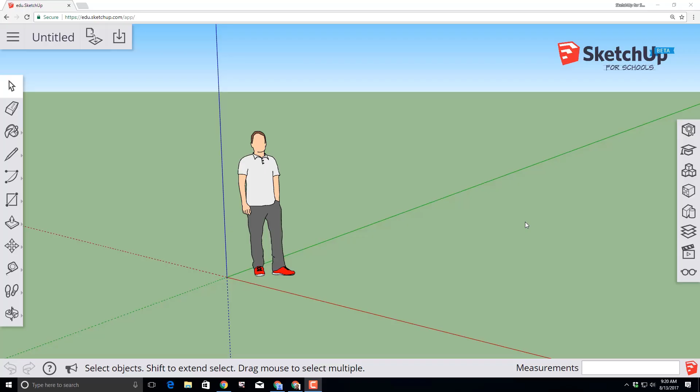So, let's get cracking! Welcome to the SketchUp for Schools Ice Cream Shop tutorial. Let's start by naming our file and calling it Mike's Ice Cream Shop. Mike is the model on the screen, so that's why we choose that name.

Click OK and it asks you what folder you want to put it in. We put it in our SketchUp Models folder, which is created automatically for us when you first launch SketchUp for Schools. All of these are stored in our Google Drive.

Mike's job is to give us a sense of the size of the objects we draw on our model. We're going to click Select right now though, and we're going to press the Delete key to remove him from our screen. Notice that when we make a change, it says you need to save, so it always keeps us alert that we need to save these projects that end up in our Google Drive.

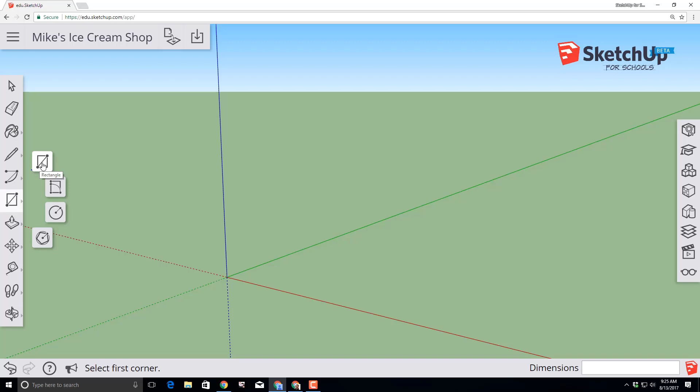Let's start building by moving over to the toolbar and clicking on the rectangle tool. SketchUp is a click and release program, so you click and let go, and then click the tool you want to use. Notice there are so many cool options.

We are going to use the rectangle, and then from the origin, notice it shows you the origin. I want you to click and let go so that the tool is adjustable, and then type on your keyboard 30 with the foot symbol, then comma, and type 20 with the foot symbol. Notice it shows up down in the dimensions box, and when you press enter, you are rewarded with a box that is 30 feet by 20 feet.

Let's change this flat shape into a three-dimensional shape by using the push-pull tool. Click push-pull, click the center of the shape and lift it up, let go of the mouse button, and then type 10 with the foot symbol for how large you want that to be.

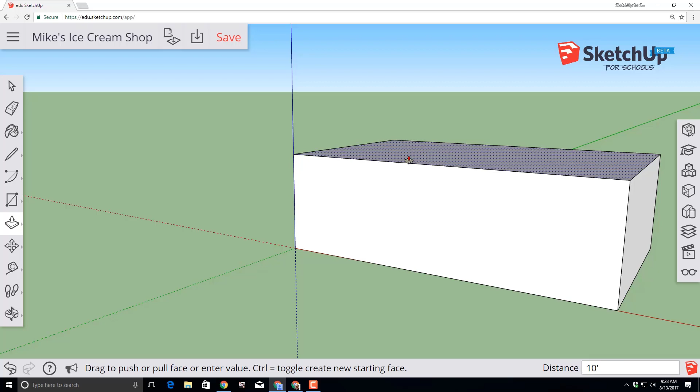Let's give our ice cream shop a little pizzazz by using the orbit tool to drag the mouse so we're looking underneath. Switch to the amazing offset tool. Click that face and extend it past our original shape. Type the number 3 with the inch symbol and press enter, so it gives us a 3-inch offset.

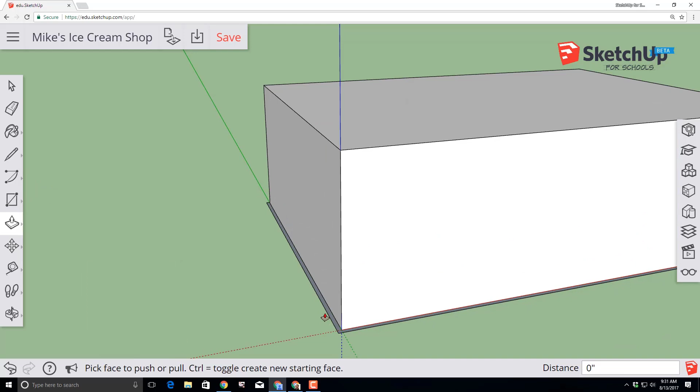Find your orbit tool again. Drag downwards so that you can see that new offset. Switch to the push-pull tool, and I'm going to scroll in so we can see this better. Click on that face and lift it up, typing 2 with the foot symbol so it snaps to exactly 2 feet tall. Use the orbit tool to look at the top, scroll out so you can see it a little better.

Click the offset tool, and click the face, and then with it adjustable, go past the original shape and type your 3 inches again. Switch to your push-pull tool, click on that newly made offset, and we need to make it 2 feet tall as well by typing 2 feet and pressing enter.

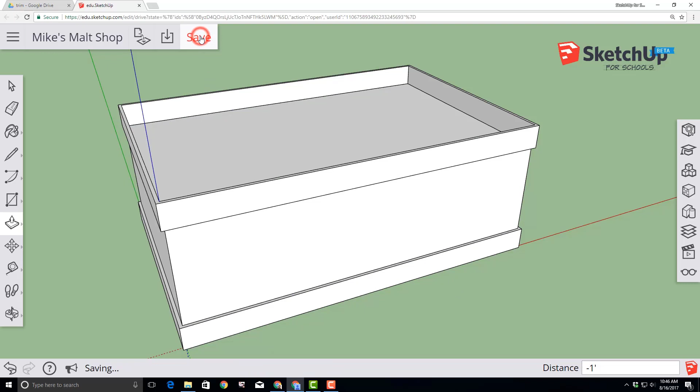It's important to note that SketchUp for Schools does not have an autosave, so let's click save at this time before moving on, and stay aware of that red save button.

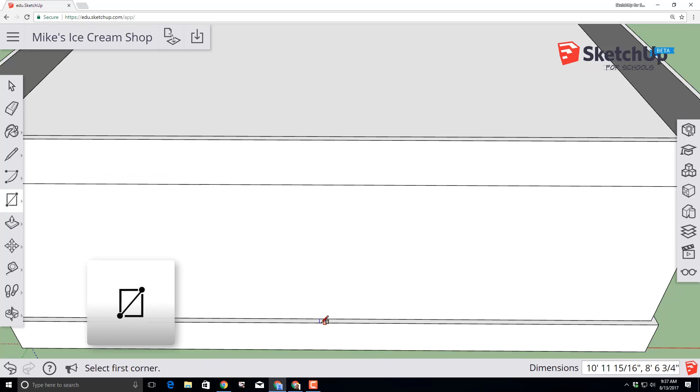Use the orbit tool to spin your malt shop around so you can see the front and are looking down at your offset. Switch to the rectangle tool, and then with the rectangle tool, find the cyan midpoint.

Move the mouse to the back edge of that wall and type 3 feet, comma, 3 inches, and press enter. Repeat that process in the opposite direction, also typing 3 feet with the foot symbol, then a comma, then 3 inches, and pressing enter.

Let's bring the erase tool into play, and let's eliminate that box. Notice we've now made a 6-foot entryway.

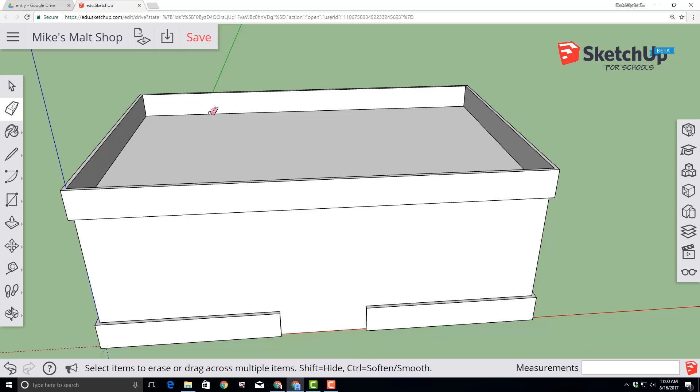Let's clear out that entryway with the push-pull tool. If you bring this down and touch the edge point, it cuts out all those instantly. Then let's use the eraser again to erase that line that was going through. Since our entry is completed, let's click that save button.

Let's add an awesome door to our entryway. First, let's use the orbit tool so that we're looking at our store from below. This helps us find the midpoint in a moment.

Click on the components choice and type SketchUp for Schools door, making sure you do a capital U for SketchUp, and that will give you the awesome door for our ice cream shop. When you click, it'll bring it in, and if you go to the midpoint of our entry, you can immediately snap it into location. With that completed, let's click Save and then move on.

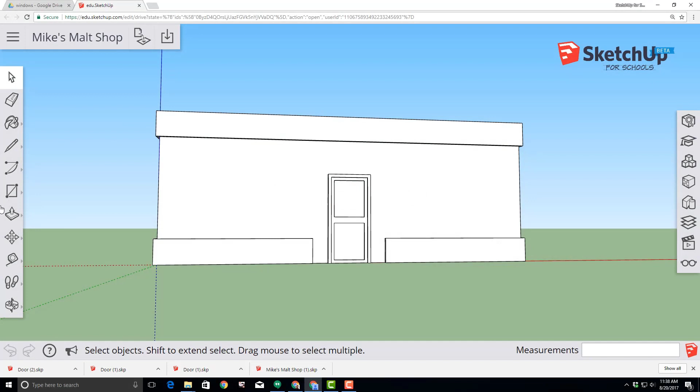Let's add some amazing windows to our project. Our first step has us clicking the tape measure tool. Click on the tape measure and click on the edge of our building and type 2 feet, so it gives us a 2-foot guideline. Do that exact same step from the other side, doing 2 feet as well, and then go in between the door and the trim and make a 3-foot high guideline.

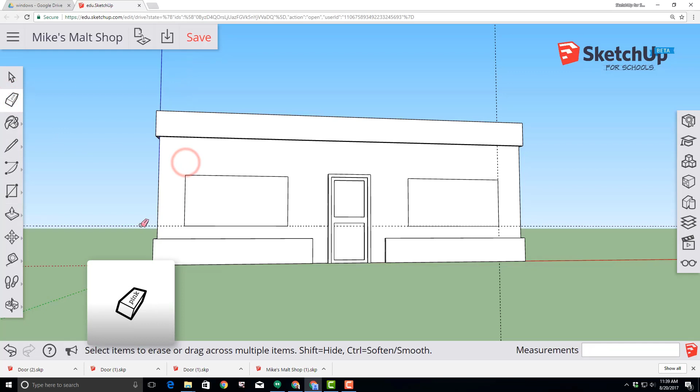With those guidelines in place, switch to the rectangle tool, click on the intersection, and make an 8-foot by 4-foot rectangle that'll be our window. Do the exact same thing on the other side, typing 8 feet, 4 feet, and pressing enter when you're done. Switch to the eraser tool and remove those guidelines so they are out of our way.

With that completed, switch to the amazing offset tool, click on the edge of our item and type 3 inches to create a 3-inch offset. Do the exact same thing on the other side. Then switch to the push-pull tool, and with the push-pull tool, pull that trim out 3 inches, typing 3 inches and pressing enter.

Congratulations on making epic windows. At this point, hit save, and let's move on to awnings.

Let's add some amazing awnings to our ice cream shop. Start by using the tape measure, moving to the edge of the wall, and coming in 1 foot by typing 1 foot and pressing enter. Do the same thing from the other side.

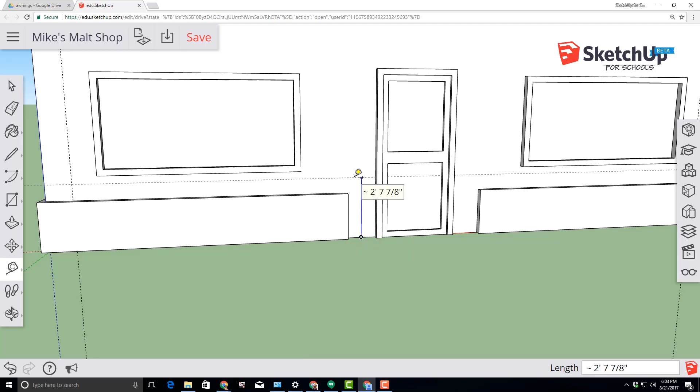From the midpoint between the door and the trim, make sure you're on the blue axis, type 7 feet, and press enter as well. This creates a nifty little intersection for us to make a rectangle from, and we want to make a 10 foot by 2 foot rectangle, and press enter.

With the select tool, double click our newly created awning and make it a component, naming it awning. Then click on the glue to vertical choice and click on OK.

Switch to the move copy tool, click on the right corner because we're going to connect it to this corner, tap Control to go to copy mode and snap it to that intersection. Switch to your eraser tool and let's erase those guidelines we created.

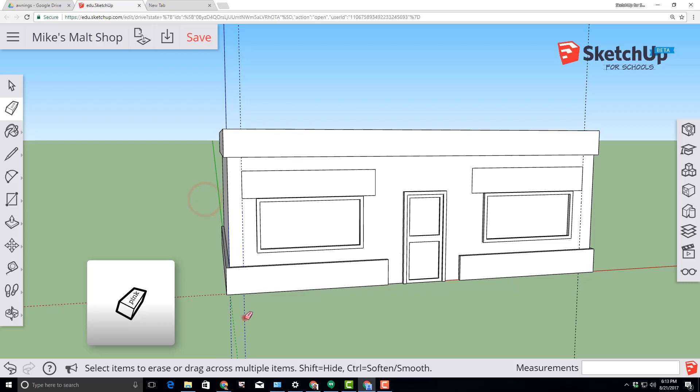Using the select tool, double click our new awning and use the push-pull tool to pull it out 3 feet by typing 3 feet and pressing enter.

Orbit so you can see it from the right side. Grab the 2-point arc, click on the top corner, the bottom corner, and type 6 inches so it creates a 6-inch arc. Choose the push-pull tool and push it all the way across, touching the little red point to the end point to complete our shape.

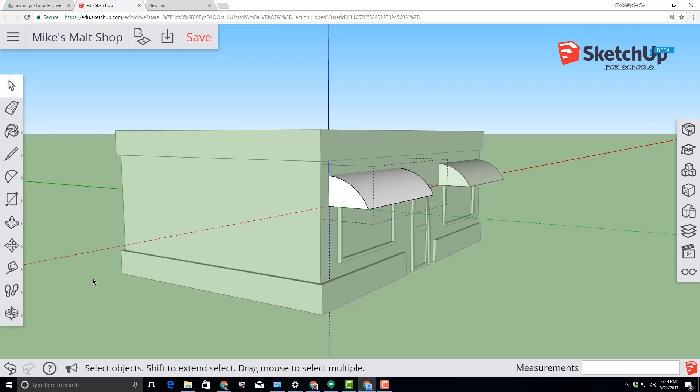Switch to the select tool and click anywhere out in space to close our component. We're only halfway through our awnings, but let's hit save just because it's a good practice to get into.

Switch to the pan tool and drag everything a bit to the right. Switch to the orbit tool and look below your project. Find the move tool and click on the bottom right hand corner of the left awning. Tap Control, notice the plus sign, to go into copy mode and attach it to that edge of the building.

Switch to the rotation tool and click on the first corner of our project and the last corner of our awning, and then rotate it 90 degrees. If you move to the protractor with your mouse, it'll snap to the 90-degree mark.

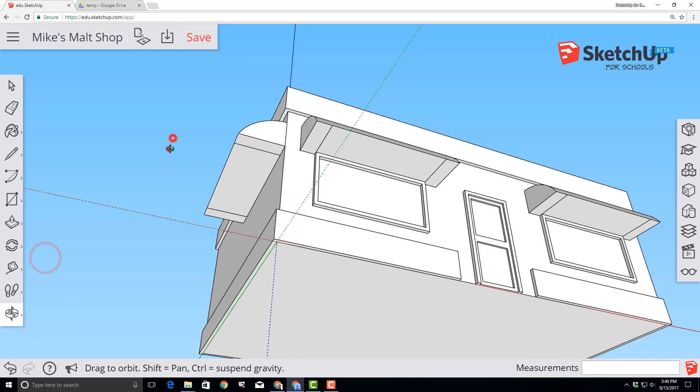Switch to the orbit tool and drag so you can see your project from the top. With our awning selected, switch to the scale tool. The scale tool has handles, and when you go from corner to corner and make it adjustable and then type 0.6 and press enter, it scales it to 60% of its original size.

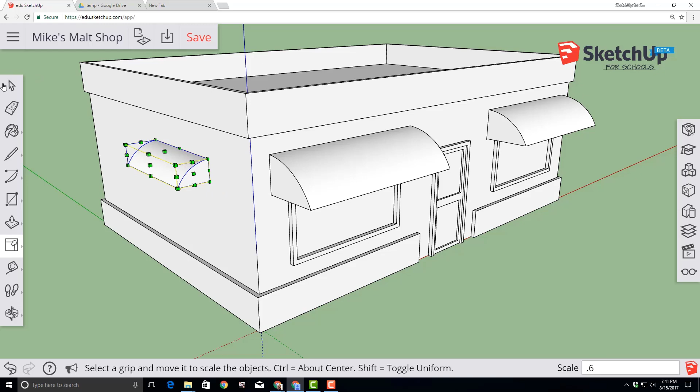Orbit around and take a look at how awesome your ice cream shop is turning out, and then make sure you remember to click save before moving on.

Double click the left awning to enter the edit mode. With the select tool, click the left arc, then click the move copy tool. Click on that arc again, hit Control to go into copy mode, and move that arc to the other side.

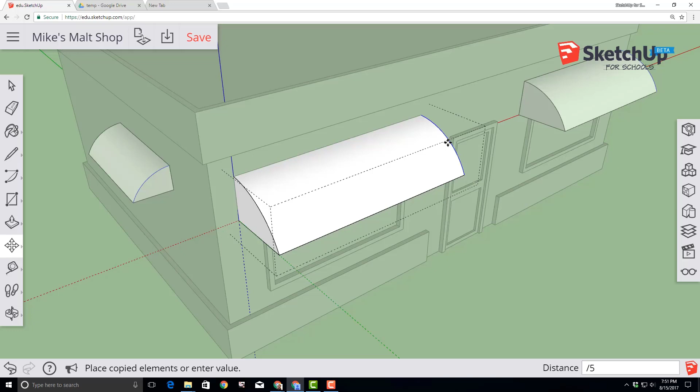Click and then do divided by with the divided by key and press 5 and then press enter, and it will instantly slice all the awnings into 5 equal sections.

Components are amazing this way because they make us so much more effective. Click on the materials and find the red color from the color choices and color every other piece of the awning red so that it becomes red and white. When you're done, click outside the box to close the editing of the component, and then click Save.

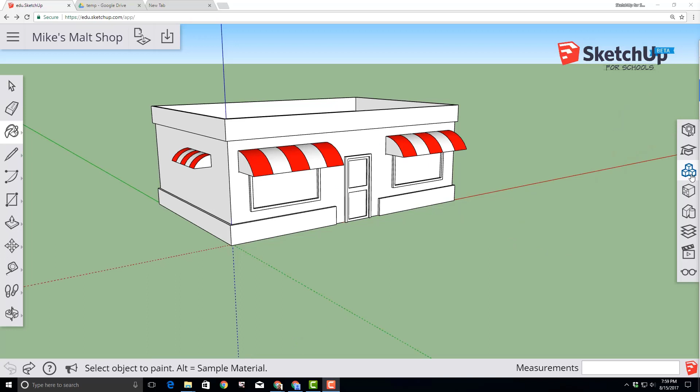Now, let's select a color from the materials to paint each wall of the shop. I'm going to paint mine a shade of blue.

Use the Orbit tool to move around your building and paint all of the walls of your ice cream shop. Make sure you orbit when you're finished to check and see that you got them all. Since we've made changes, let's click Save.

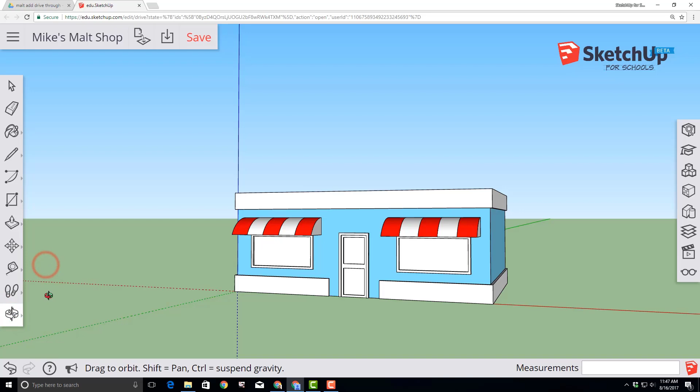Grab the Orbit tool and rotate around so you can see the left side of our building and the underside of our awning. Switch to the tape measure tool and click on the line under the awning and make a 3-foot line along the blue axis. Let's orbit so we're looking a little bit more from the side.

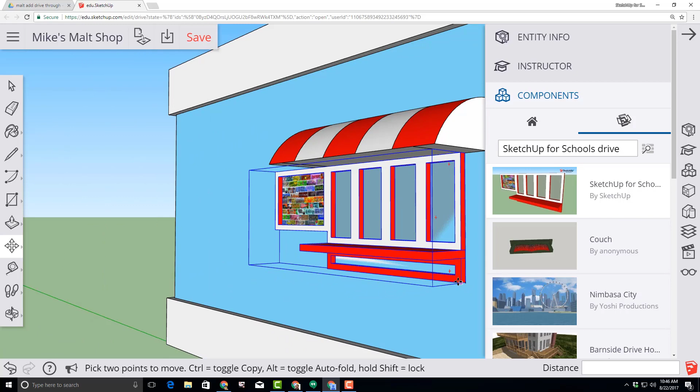Click on our Components tool, type SketchUp for Schools Drive and press enter, and you'll be treated to the SketchUp drive-through window. Click it, bring it out on the face, click to set it down on that face, grab the corner by zooming in and finding it, and then snap it to that guide point we made earlier. Notice it tells you you've reached the guide point by popping up the little window. Scroll back out, pat yourself on the back for being awesome, and click that Save button.

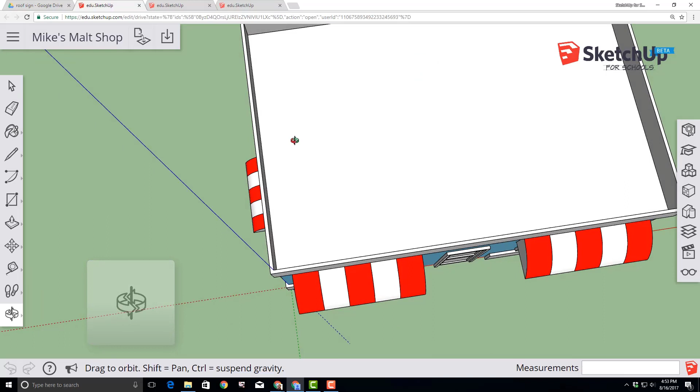Use the Orbit tool to switch so you can see your building from the top. Choose the Rectangle tool and make a 30-foot by 2-foot rectangle by typing 30-foot, comma, 2-foot, and press enter. Use the Push-Pull tool to raise that up 6 feet and press enter.

Orbit so you can see from the front, and use the Push-Pull tool again to pull the face out so it matches the face on the front of the building and both sides.

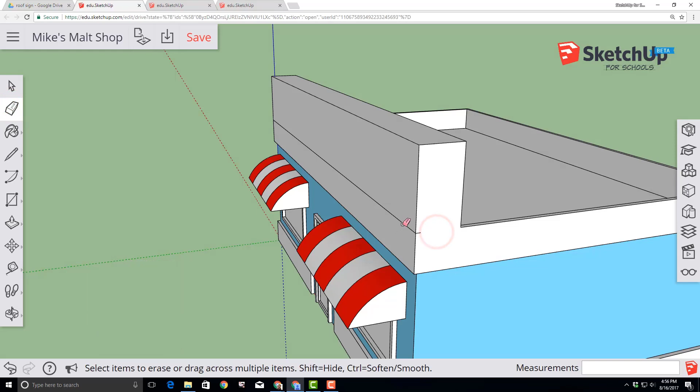Choose the Eraser tool and erase those seams to make it a one-piece design again. When you have that completed, let's click Save so we never lose our work.

Scroll out so you can get a big look at the world, click on the components, and then type in SketchUp for Schools Ice Cream and press enter. Scroll down and find the one that was created by SketchUp. Click and bring it out in the world and set it on the face of your shape.

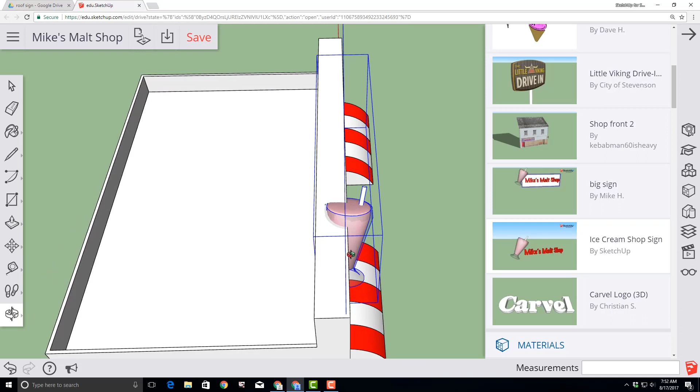Orbit so you can get a better look at it from the side, scroll in so you can see it better, and then use your Move tool to adjust it until you're totally happy.

When you have it placed, use Orbit to move the world so you can see the back. Click the top of the pediment, switch to the line tool, find the midpoint, and connect it across. Switch to the rectangle tool, click on one corner of the pediment, and stretch it out until you see it say that you just created a golden section.

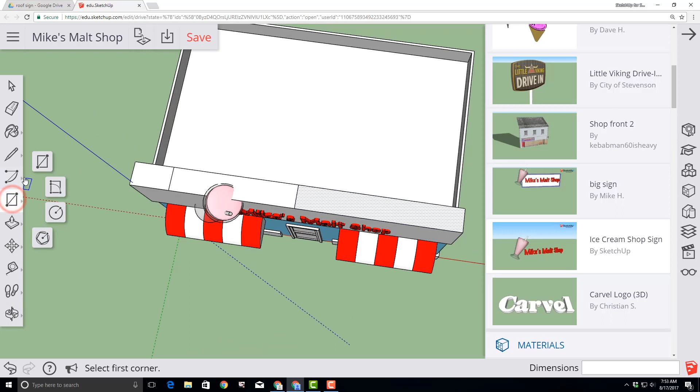Do the same thing from the other side. I'm going to orbit around so I can see it better. And then go back to the rectangle and create another golden section.

Use your orbit tool so that the world is more flat. Click the line with your select tool that is in the middle, switch to the move tool, and lift that line up from its midpoint 4 feet by getting on the blue axis, typing 4 feet, and pressing enter.

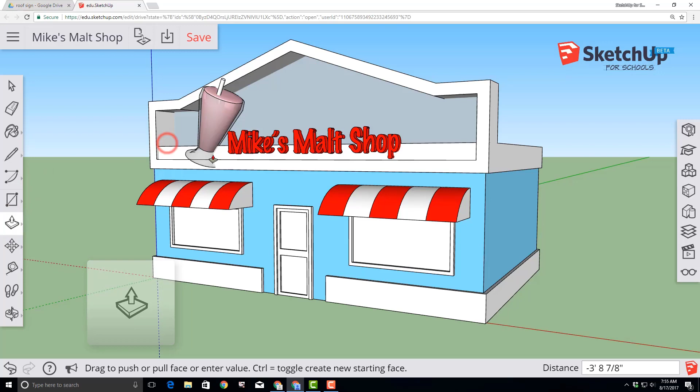Orbit so that you've got a look from the front or the front side. Switch to our old friend, the offset tool, and we want to make a 10-inch offset. When it's adjustable, type 10 and press enter. Use the push-pull tool to push that offset so that it matches the face of the building. Then switch to the eraser to get rid of that line that appears.

Navigate to materials and match the colors to the rest of your ice cream shop. With everything in place, let's make sure we click save so we don't lose our work.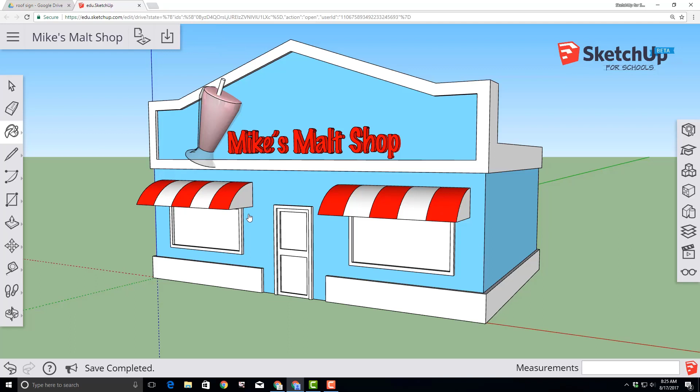Let's make our trim on our malt shop look a little more fancy. Switch to the circle tool, click out towards the red axis and type 1 foot and press enter. Switch to the push-pull tool and pull that up so it matches the height of the rest of our trim. Use the eraser tool to erase the lines.

I'll zoom in so we can see those better. And then repeat that process all the way around the building at all of the endpoints.

When you've completed the trim all the way around the building, then switch to your materials and find the asphalt and concrete. Select a concrete color you appreciate and add it all the way around the building.

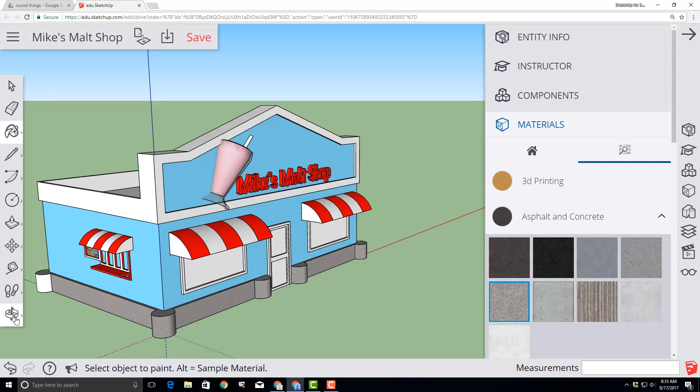Take a step back to see how awesome your project looks, orbit from every side, and practice clicking and saving as well.

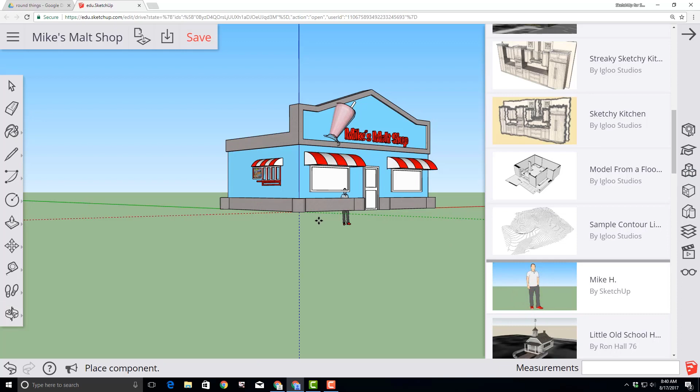Let's add a customer to our malt shop and put him by the order window. Click the components box, search SketchUp for Schools Mike, and scroll down to find Mike H by SketchUp. Bring him into your project, set him by the drive-through window, scroll in and adjust until you're happy.

Let's wrap up the colors on our project by going to materials, clicking the browse tool, finding glass and mirrors. Pick a glass texture you think will look great on your shop. I'll use the gray one, click the select tool, double click on my window component, go back to that gray glass texture, and put it on both windows.

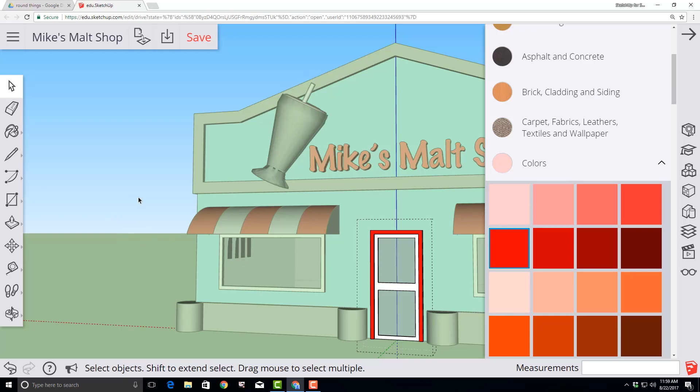I'm also going to add red trim by revisiting the colors, choosing red, and making the door that awesome red. Remember, when we click select and click outside our component, it finalizes that component, and we can take a step back, look at our amazing malt shop, and hit save once again.

Now that you've got everything put together, use the awesome components and all the skills you've learned to make this malt shop look just the way you'd like. Thanks for following along in the tutorial. Make sure you save your work, and we hope these skills are useful as you keep SketchUpping.

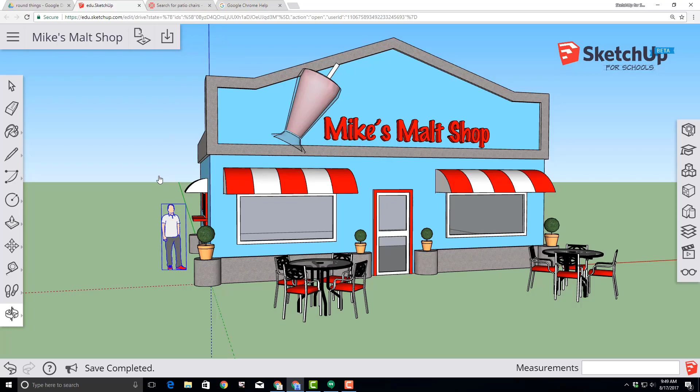Good day, world. It's me, Mike Harmon, or HLModTech, and I'm here today to show you how you can participate in the 3D Vermont project without even installing SketchUp on your computer. You can use a Chromebook or any kind of laptop. Let's get started using my.sketchup.

Up in your browser window, type my.sketchup, and it will take you to a 3D Builder online site. If you're using a school account, you could also use SketchUp for Schools. Both are great choices. When you get to this site, you can just immediately click Start Modeling.

Of course, you need to sign in, and we're going to sign in using Google. You may get a message about cookies, and of course you need to use those. And with any project, we need to name and save it.

Let's start with a click and then enter the SketchUp folder. Note this is saved with Trimble and not in your Google Drive, and then give your project a name. I'm going to use my same Wilder Vermont project, just because I want to show you how well this mimics the actual SketchUp program you have to install.

Step one is to select Josh and hit delete. I want to use a location, and they've got an add location tool. In the professional version of SketchUp, it shows the buildings on these streets, which is wonderful, but you can see here it does not show me the building size that I want. So let me show you another way to get it.

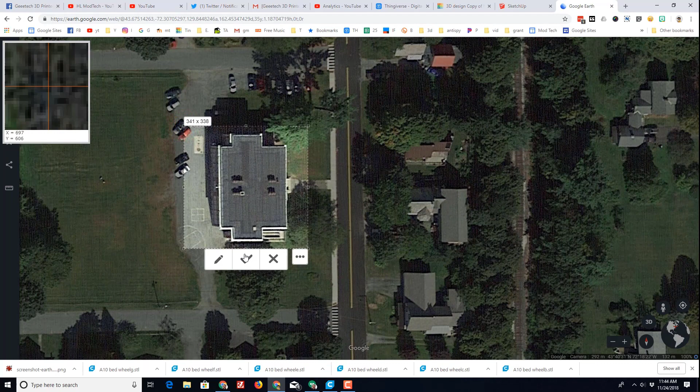Once I grab it, I hit the check mark to bring it in, save it to my downloads, return to SketchUp, and bring in that file by simply dropping it on this location. Here's my screenshot from the downloads folder. Drop it in as an image.

I'm going to double check by grabbing the tape measure tool, and let's see how close I am to the right dimension. If I go from here to here, right now I'm at 69 feet, so I'm going to stretch that out a little further. If I click on that image and do the scale tool, I can pull that out until it's the size I want.

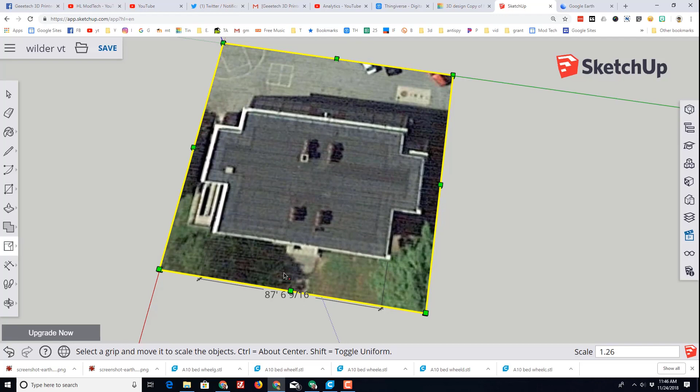This is kind of neat - you can see that it actually moved with it, so I can tell my building is now 87 feet across. With that completed, it's time for us to get our axis set up.

Back on that same tool, find the axis tool, and let's zoom back to the back corner. When you bring this out, we want to get it right to the spot where you believe the edge of your wall is - I'm going to call that my red axis.

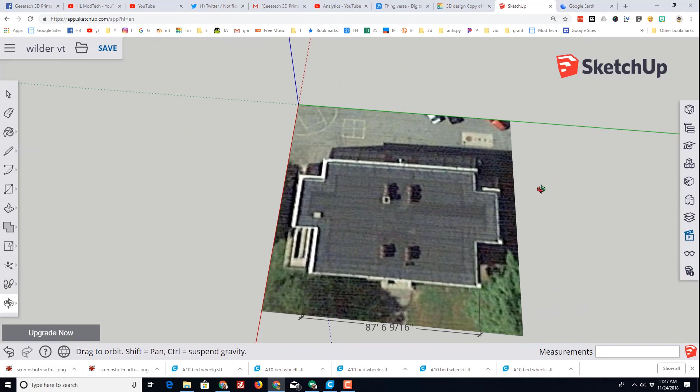Then I'm going to orbit, pushing in my scroll wheel so I can orbit, and I'm trying to line up with this part of this wall.

You want to make sure you have that as good as you can, because this is the first part of your building. I'm going to be happy with that.

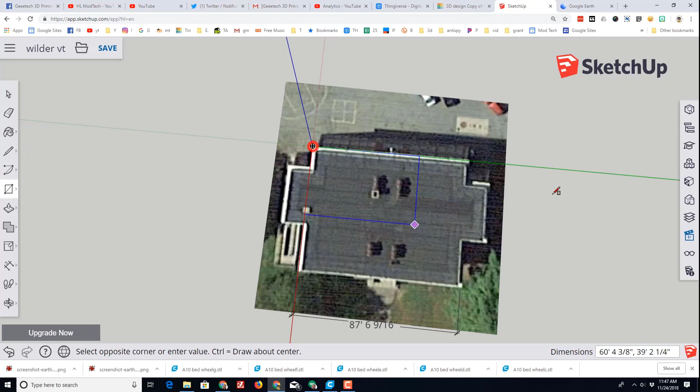Now I'm going to click the rectangle tool. Remember, you always click and release in SketchUp. So I just clicked and I'm stretching this out, and I'm moving in to put it on the exact corner of that wall.

Now I'm going to put in the little piece over here. Notice these are exactly across from each other. I'm going to do this one because I can see the white edge a little better in my picture. Then I'm going to move from this location, inferring the location, and I want it to go to the same spot on the other side. I'll double check this infer by moving across, and it'll show me when those are lined up. Then I click and make them permanent.

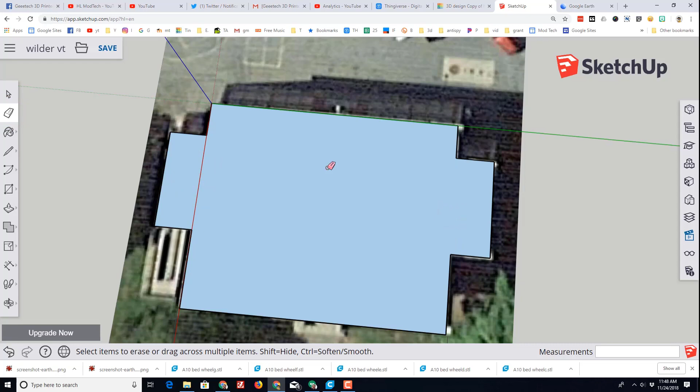Grab the eraser tool and remove those two sections that are inside the shape. This blue means that the face is the opposite of the way I want. I want the white face.

Now I'm going to push-pull my building up in the air so that I can add the texture of the front of my building.

We're going to go back to Google Earth to do that, and we're going to use the really nifty Street View. I'm going to drop it right in front of the building, and when it spins in there, I'm going to orbit using the mouse tool and get a good straight view of our little Wilder school.

Once again, I'm going to go back to the screenshot tool. I'm going to select that area, and grab from the bottom corner of my building all the way to the top corner. Notice I lose a little bit down here on the bottom because of the way everything is skewed, since this is a satellite image, or an image even from the low area of a vehicle on this one.

I'm going to hit save, put it in the same spot. Let's return to SketchUp, and let me show you how to bring in that image.

Once again, insert. This time though, when we go to the folder, we still drop it on top, but we are going to use it as a material. We want to put it in this lower corner of our face, and then stretch it out so it goes to the edge. You'll notice the height is way off, and that is intentional.

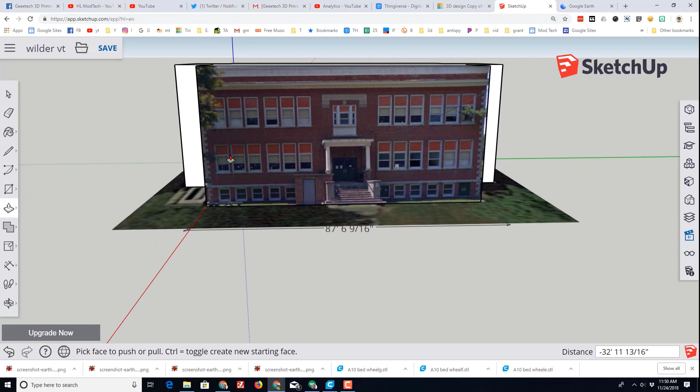We are going to use the push-pull tool to pull it down to the approximate correct height. And then we need to get it so it's straight. We're going to do that by right-clicking and using the texture position tool.

These little points allow you to click and then move to the exact corner where it really is and click and set it down, and then grab it and drag it to the edge of the building where it should be.

I'm going to zoom in up here, click and remove the little point, and then I'm following this wall up my texture, and I think that texture ends right there. Then I'm going to grab that, and snap it to the corner of my building as well.

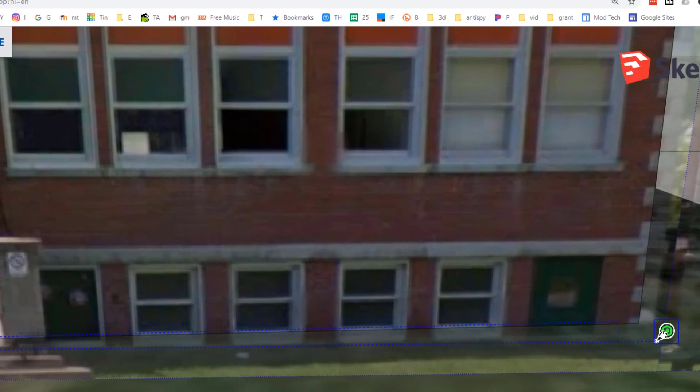Click, release, move to the corner of the building. I can see the edge of the bottom brick right here. Grab and stretch that to the edge of the building I built. And one last time, do it up here on the top.

I'm going to hold down Shift and the scroll wheel so I can zoom in on this corner better. Click and remove, find the edge of the actual building. Click and snap it to my shape. Double check to make sure that you've got everything where you want.

I do not have this texture to the top of the actual building. I think when I moved it, I missed because I did not note the part that was in the tree. Then I'm going to click and snap that in.

Now I'm not happy with this side, but this is how you click, adjust, and double check till you are happy with your shape.

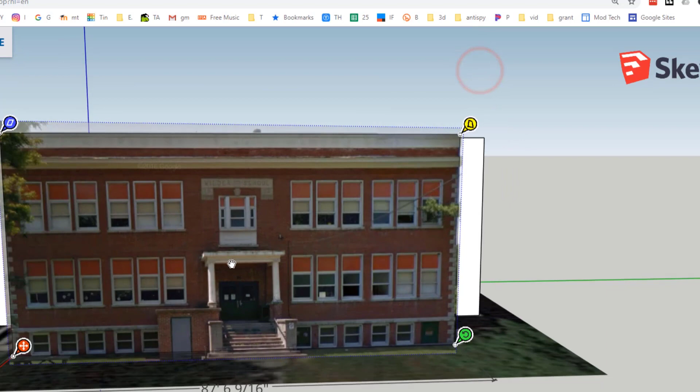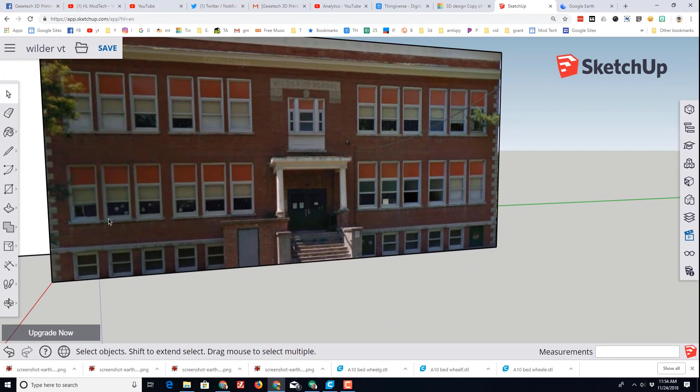When you're totally happy, right click and choose Done, and you're ready to start adding the windows to your awesome project. Now that I'm happy, I'm going to erase the ground so it's out of the way. I don't need this measurement anymore. I'm 6 inches off of perfect, but I'm happy with that for the building I'm creating.

Alright friends, I've got a trick for you. Right click and do an align view so you're looking at it nice and straight. We're going to add windows, starting with these 3, but here's a bonus trick: from this side, drag from right to left to select all the pieces we don't need and hide them. That way, as we're building, we don't accidentally select anything on the back of our project.

Draw your first window the exact way you want it. We want all of those windows to be straight across from each other, so let's grab the tape measure and mark out an axis all the way along the building so we've got something to build off of.

Move to your select tool, triple click that first window, hit M for move, then click on the first one and tap Control so it's in copy mode. If you look at the bottom of your screen, it mentions this every time - see how it says toggle copy? So I'll hit M for move again, click that corner, toggle copy again, and set my next window right where I want it.

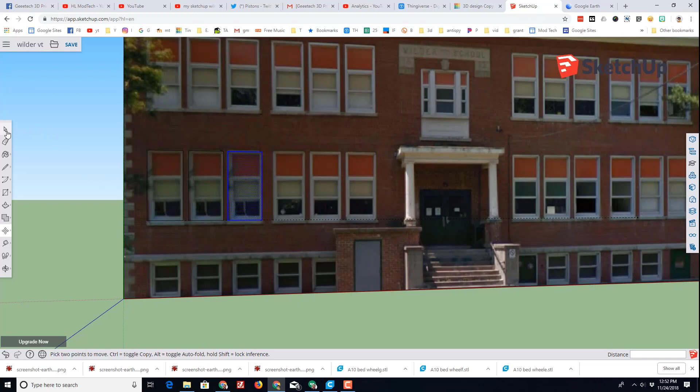Remember, the images are skewed, so trust your judgment instead of how it looks in the picture.

Turn to the side, switch to push-pull, and let's push that window in 6 inches, which is a nice number to show the texture when you're 3D printing. I'm going to press Enter after typing 6 inches so it snaps exactly to that size.

I'll click on the second window and make it so it touches the face of the other one, moving the arrow over so now it has the same distance. Then for the next one, I'll just double click and notice they are all the same. Here's another bonus - you can double check from the back to see just how well it turned out.

Select all of those, so now you've got 3 of them selected. Once again, do the move tool - click M for move, Control for copy, and set those 3 right beside, noting that they stayed on the red axis.

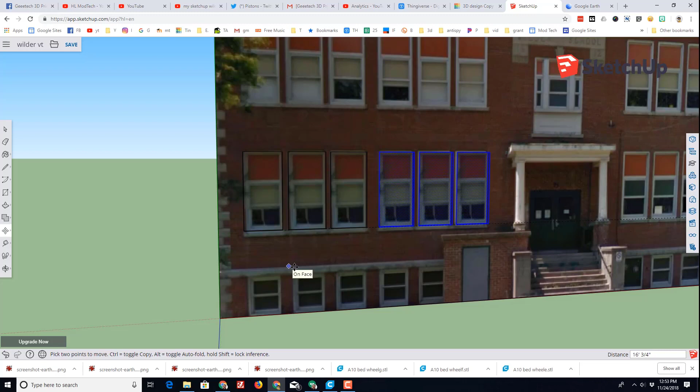I'll scroll out a little bit, hit spacebar to select, and do the entire chunk of windows. Once again, I'm doing move, Control copy. This time I'm double checking the green axis and lifting them up so they're in the exact same spot, then double checking to make sure they are all the way I wanted.

We'll finish our windows by doing that exact same trick - grabbing all of them, hitting M, tapping Control for copy, and setting them where those windows would be. Take a peek behind, and bam - you've just done all of your windows in one amazingly easy step.

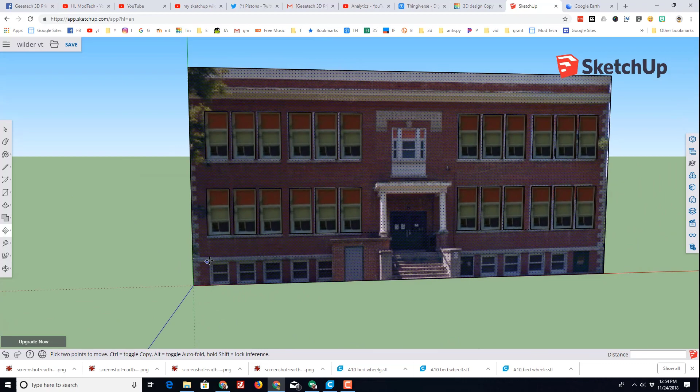Let's use a similar skill to draw this little outcropping. I'll take a rectangle and start it at this edge, get it to the size it needs to be on that side, then zoom all the way over to this side. Once again, it has a bit of a skew issue, but we just do what looks right to us.

I'll take that design and slice off the pieces where I want it gone, making sure these 2 pieces I attach are also perpendicular, then erase the pieces that were in between. I'll use push-pull and pull that out 4 inches by typing 4 with the inch mark and pressing Enter. Then I'll do the same thing on the other side - 4 inches, and press Enter. Friends, we're going to call that the end of lesson 1.

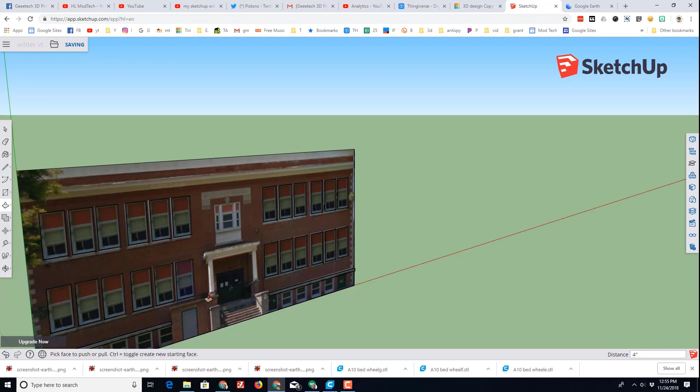Make sure you hit save. To get your stuff back, hit the Views tool and select unhide all to bring back our project. As usual, hit save just to make sure you've got it. You don't ever want to lose your work.

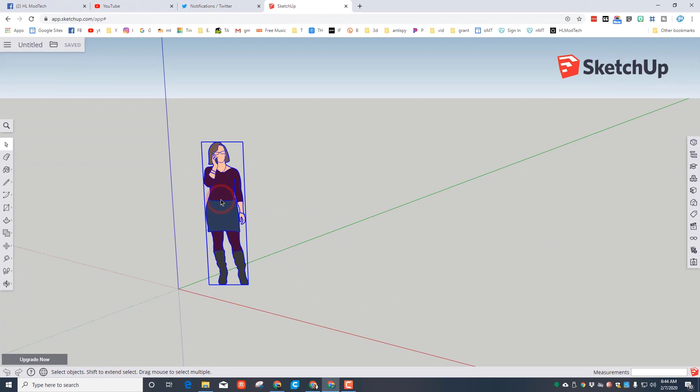Click on the person in the middle and hit delete. Click Untitled, and we need to name the project. Click on the little SketchUp folder, and then down in the bottom type in the name. I am going to title mine Glider MDH4 because I've made this once or twice.

Friends, SketchUp is a click and release program, so we click the toolbar and we click again to choose the tool we want. This location is called the origin, is where we start designing today. I want you to click and release so that mouse button is not pressed. If you just type 480, 280 and press enter, it records those dimensions and makes that exact shape on your screen.

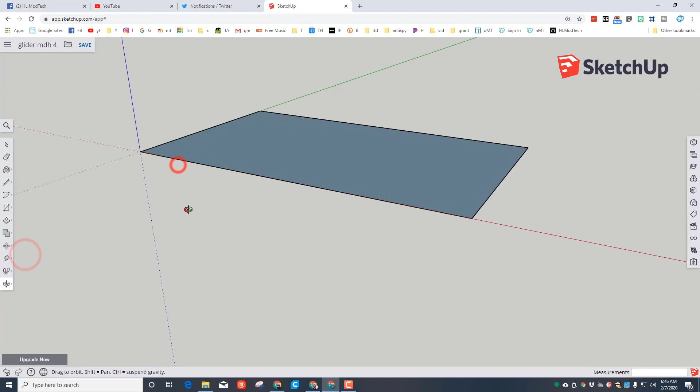We're going to click on a cool choice here. Instead of orbit, we're going to fit view, and it zooms right in. If you roll your scroll wheel back, it lets you see it. If you switch to the orbit mode, you can look at it from an angle.

We do not want the middle of this, this is just our guideline for how big the Glowforge bed is. We do want to prove our measurements, and we're going to do that with the dimension tool. Click the origin, click the end, stretch it out to prove you've got a 480 millimeter build area. Up in the top corner, click again, click the bottom, stretch it out, and prove you've also got 280 here. Remember, it's 1, 2, 3 clicks to make those little locations.

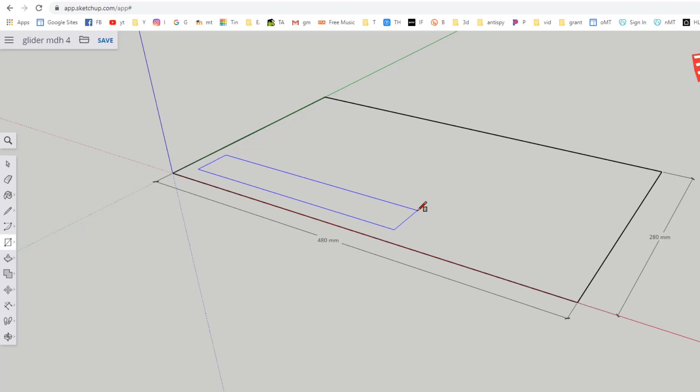We are going to use those same techniques to draw our fuselage. In the area where we can build, click a rectangle, stretch it out, and then type 300, 15 and press enter. This is our fuselage shape. Now you can choose other numbers later, I'm just going to choose 300 because I know that it works.

I'm going to scroll in and look at the front of this, and I'm going to draw another rectangle, and make this one 40, 12. This is going to be the front where there's a catch so the rubber band holds. I want to get rid of this line right here, so I simply click the eraser and get rid of it. I want to click on the pencil tool, and draw an angle so that it's more aerodynamic. I'm going to hit erase and get rid of that corner, and now we've got a way to launch our glider.

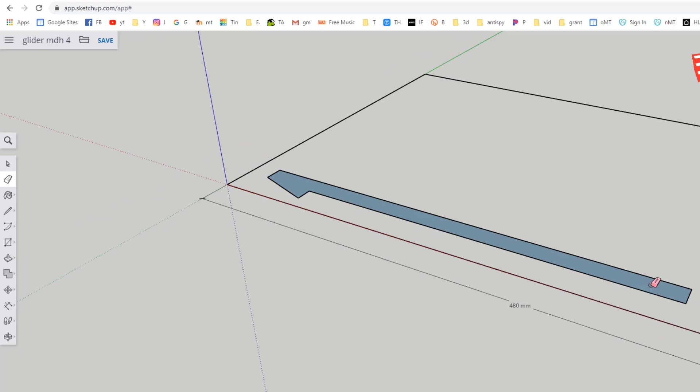You could choose to taper the front end a little, but I am going to warn you that this area is a spot that quite often fails on our gliders because the front of these cardboard gliders are kind of weak. We do want an area back here that we can hold on to, so once again we're going to use that rectangle tool, and this time I'm going to pull it out, and I'm just going to type 10, 30 and press enter. It went the wrong way, so I'm going to do Control Z.

You'll notice right now it's stretching in every direction. That is because of the modifiers on the bottom. If we tap Control, it switches to the normal direction that we want to go, and I'm going to do that 30, 10 instead of what I typed last time.

I'm going to switch to my pencil tool, and make that shape aerodynamic as well. Notice now it will not catch. I simply use the eraser, and I cut that off and get rid of that line as well. That is going to be the fuselage for our sweet little aircraft. I'm going to make 2 of those. So right now I'm going to triple click, so that was 1, 2, 3 clicks.

I'm going to switch to the sweet little move button. I'm going to grab this corner up here, but while it's moving, I'm going to tap Control, which is the copy modifier. And this is how you copy. When you click and set it down, you get another one.

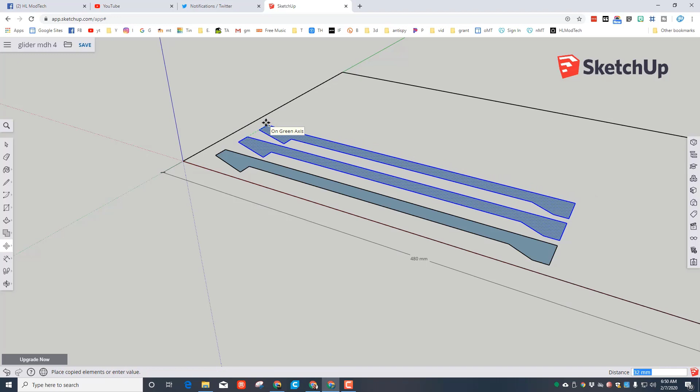I'm going to make a third fuselage. I can decide later if I want to glue all three together, but it's so easy to cut them and they fit so well, I'm going to put them on there anyhow.

Let's add a wing real quickly. I'm going to do the rectangle, starting out here in the front. I'm going to click and release, and type 180, 60.

This is going to be half of a wing for my glider. I want the edges to be sloped, so I'm just going to start a line and stretch it back to wherever I want. I'll hit escape because I don't want to draw from that spot. I want to draw from this spot, and taper this wing to exactly where I want as well. I'll hit escape again, and find the amazing arc tool.

I want the 2-point arc, so I can click on the first end, second end, stretch that out exactly how I like it, and my nifty little wing design is complete. I can erase these outside edges, and you can see that that is a fantastic little wing. I don't know for sure if it'll fly, but I do know for sure that I'm going to have fun building it.

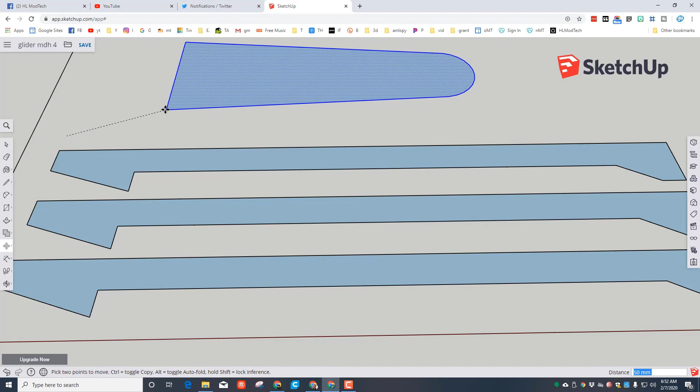Once again, I need two of these, so I'm going to click once, twice. It selects everything. I'm going to switch to move, grab that corner. As it moves by itself, I'll hit that modifier you can see on the bottom where it says Control is copy, and just set it up there on top.

I'm going to switch to that select tool. If I triple click or double click, I can grab that, and I'll hit M for move. Now I'm using shortcuts, and I'm going to just move it so it's close to the exact same spot as the other, so it's a little quicker when we print.

Real quickly, same trick for the tail fin. I'll click back near this area so I can kind of see how long I'm making it. I'm going to type 50, 80 for how large it is.

Then I'm going to use the pencil to taper it the way that I want. So I'll go from the midpoint to the midpoint, and from the midpoint to the midpoint. When I hit the erase tool, you can see that this cuts off pretty nifty.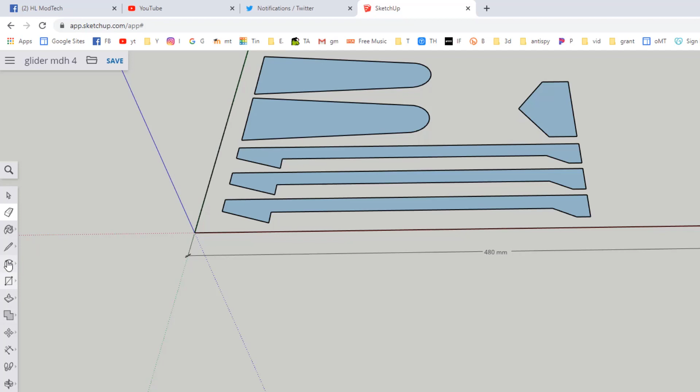As I look at it, this is quite long though, so watch this. I can change my design by simply hitting move, clicking on a piece that's easy to move, like this is pretty simple back here, to move that line straight along the red axis. And I like that a little bit better.

Let's see if I can move this point back as well, and yes I can. So now if I double click, it grabs all the shape. I'm going to do move, and just line it up with this corner so it's a little more visually appealing as I check it out.

Let's wrap it up by drawing that vertical stabilizer. Once again, I'm going to start with a rectangle. This time I'm going to make it 25, 50.

I'm going to use my little pencil tool, and cut it however I want for my vertical stabilizer. That's what I'm going to choose. When I hit erase, I can take a peek at it. It looks a little larger than my other design, so I'm going to shrink it on this side right here.

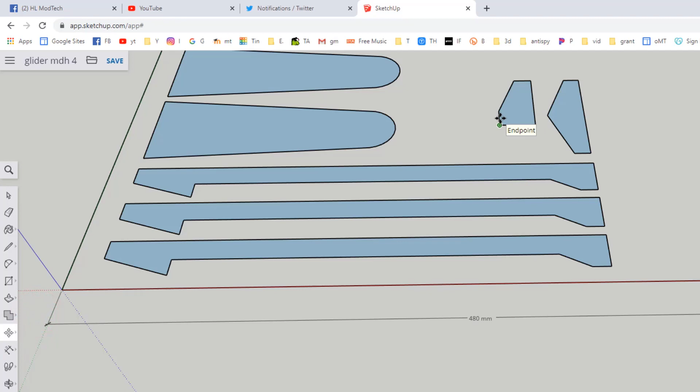Notice that whole line turns blue when I grab the midpoint, so I can just push it back, and then the same thing up here. I'm moving to the midpoint, and then I want to make sure I stay on that green axis as I shrink it to the size that I want.

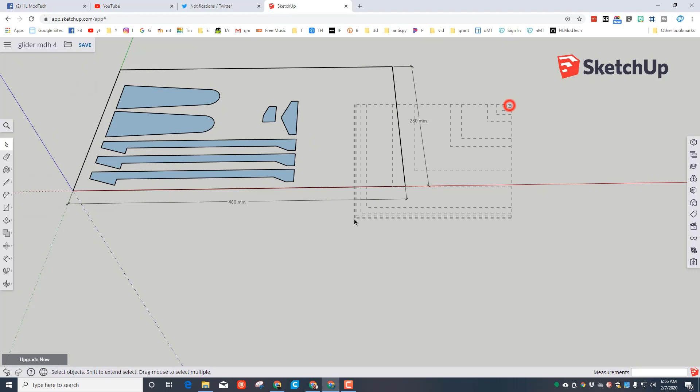My friends, right there is a cardboard glider. It fits totally in the area, so now we can grab our outside edges and delete them because we do not need them. We do need to make this all have thickness so that we can export it.

So what we do is click push pull, click on our first shape and let go, then type the number 4 so that it's 4 millimeters thick, because that's how thick the cardboard is.

For the second one, if you just start lifting it and then touch the end point of the first one, it infers that exact same measurement to all the pieces. So notice, red arrow, touch the corner, snap, snap, snap, and snappity snap. It's that easy to pick a measurement and attach it to all of them.

I want these two pieces to interlock, so this one's going to slide in this groove.

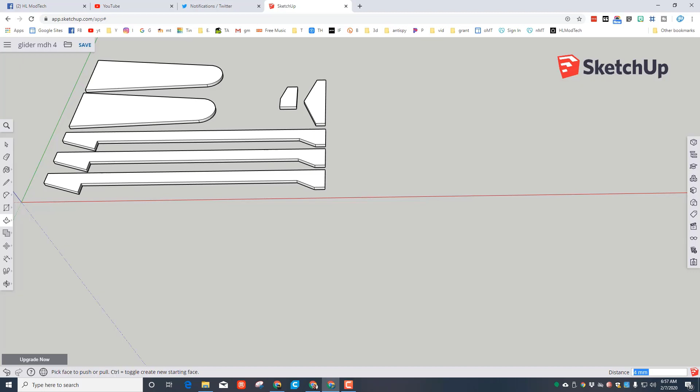Watch this trick. Let's zoom in to this part by fitting the view, and we're going to cut a notch out of it. My friends, it is this easy. Click on this corner, and when you start drawing this rectangle, make sure you tap Control to switch. Then our rectangle is going to be 10 millimeters by 4 millimeters.

So that we've got a notch that we can slide in, switch to push-pull, and push that face down to the bottom edge, so the notch is ready to be put in. We're going to switch to the rectangle tool again and go to the midpoint. When you find it, it will be cyan.

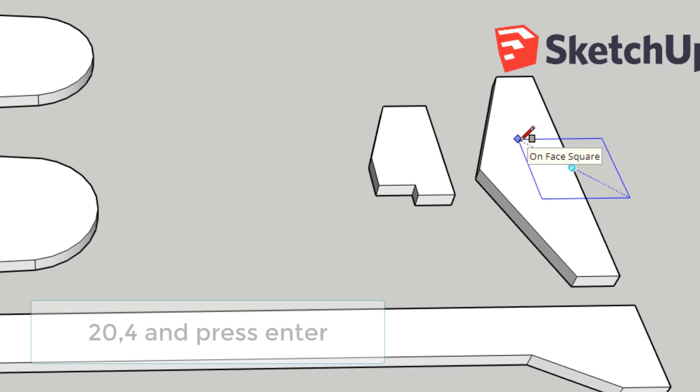This time we want that special rectangle that goes in every direction, and we are going to type 20. Notice we doubled the distance. It goes left and right, and I'll show you why in a second. Then we do the 4 and press enter. Went the wrong direction, so I'm going to do Control Z and try that again.

I'm going to tap Control, and this time I'm going to do 4, 20. This is the exact same direction that notch is. Notice we've got 10 this way and 10 out in the empty space, so we just simply erase the empty space.

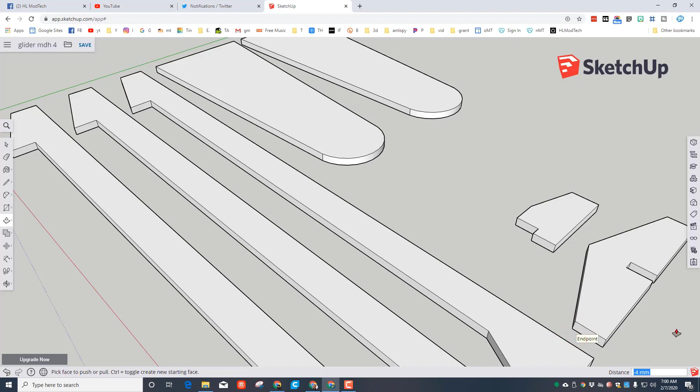I'm going to spin around and look at it from the back so you can see this push-pull better. Then I'm going to use the shortcut for push-pull, which is P, and I want to touch it to this endpoint right there. Notice it cut out that awesome little endpoint so that these can slide into each other, and it makes it easier to glue.

We could cut notches for our wings, which does make it a lot more sturdy, but this way we can put our wings anywhere along here as we try and find our perfect area of balance. So friends, we've got our glider built. Make sure you've saved it, and then we need to

Export it as an STL. When you choose export, if you're in my classroom, the STL file is what you actually want on your computer. So just put it in the H folder, it's got your name, and hit save. The reason we do this is because STLs are not what the Glowforge uses.

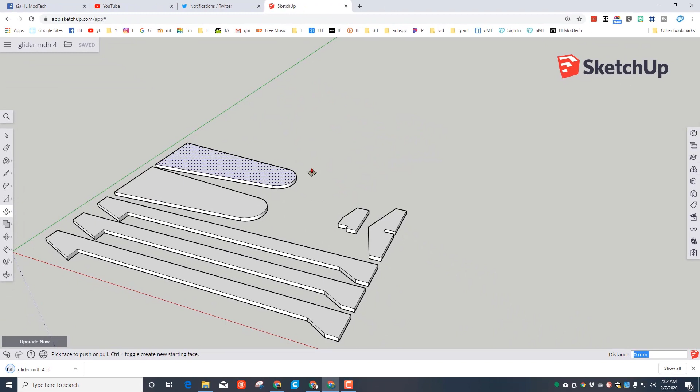To fix that, we are going to go to Tinkercad. If you've never been in Tinkercad before, simply use sign in with Google. When you get a chance, hit this little button and choose Create New Design.

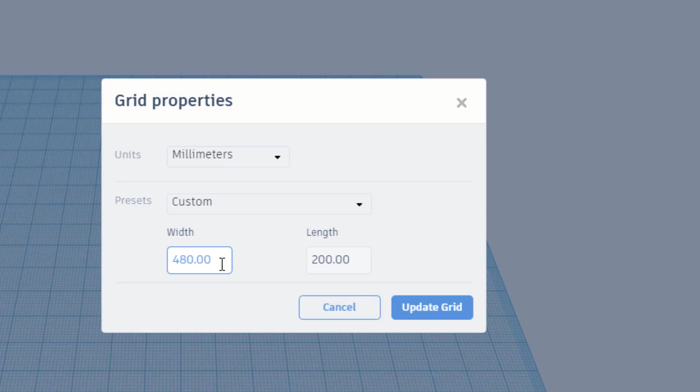When your design launches, we need to make it Glowforge size. Click on Edit Grid, backspace, type 480, same as we did in the other project, and then on the length, make it 200. When you choose Update Grid, it'll look large again.

Change it to say glider. Remember, mine was MDH4. I'm also going to put SketchUp after this so I know where I actually built it.

The magic part of this is we can import our STL. Remember, we put it in the H drive. There's my glider MDH4. I keep the exact scale and hit import, and poof, your design appears.

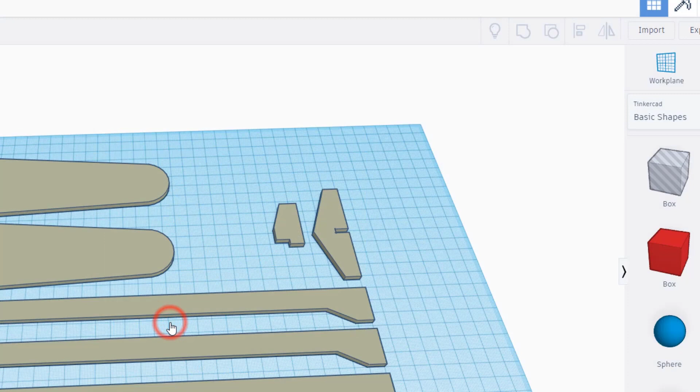Once it's in, we can send it to the Glowforge for laser cutting with the awesome SVG export. This time, if you're in my room, you put it in the STL folder, and bam, your design is ready to be cut out.

In the Glowforge, you simply hit upload, find that cool project. Remember, mine was in the STL folder. My cardboard is refreshing, I just opened the lid. I'm going to hit enter settings, and then I use a 1/200 100 speed 4mm setting for cutting my cardboard.

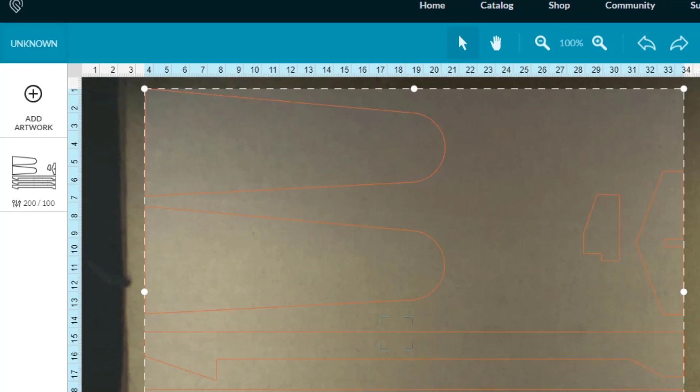And there you can see it is refreshed, so I can place it where it's supposed to be. Once again, 1/200 100. I do need to select the material. My material is uncertified, it's just free cardboard. Hit submit. When I've got it lined up exactly as I want, I can send it to the printer with that sweet little print button. Let's go see what we get.

All right, friends, this is everybody's favorite part, magic button time.

And there you have it, friends. 3 minutes later, we've got parts we can glue together to make a sweet glider. Alrighty, friends, so I'm going to make a separate video for the assembly and the flights, but now you know how easy it is to use my.sketchup or SketchUp for Schools to make a sweet, custom cardboard glider.